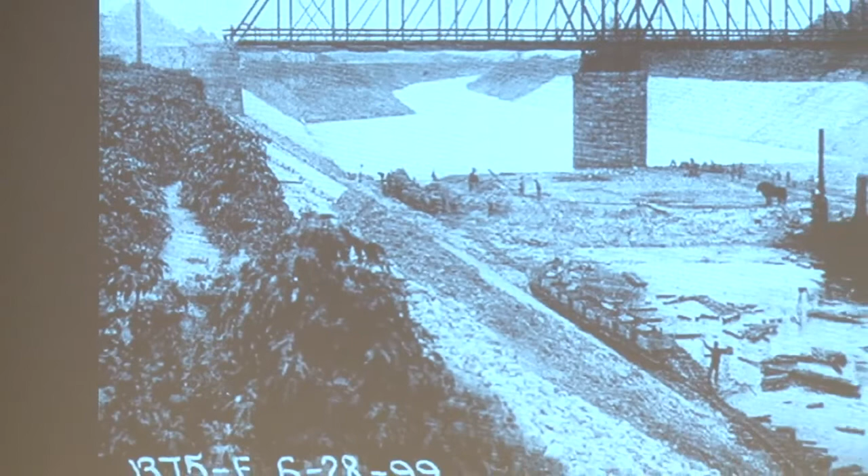But then today, as we see the effects of this over the last 100 years, we now see that this reversal is contributing to a dead zone in the Gulf of Mexico and a lot of other detrimental effects that have come to light over the years.

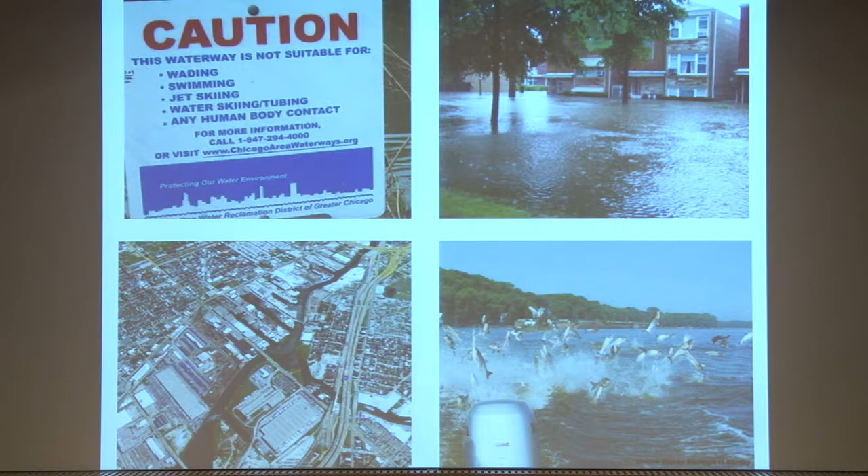In many ways, I think we work similar to industrial designers, trying to find out the facts about how problems impact people before we start jumping in with design. So with this project, we really talked to a lot of the people that use the river today, and in what ways they use it.

We also taught a studio—this was at Harvard in 2012—to start thinking about what the barrier could be. It's a barrier separating the watershed, but also potentially a bridge, and other things. So with all this research, we came to the conclusion that the problem needed to be addressed in steps.

And so it was a design problem to think of how the different steps could go toward renewing this waterway. So technical things, but also the idea of communicating this to the public, so that we could build some support for changing our use of the river.

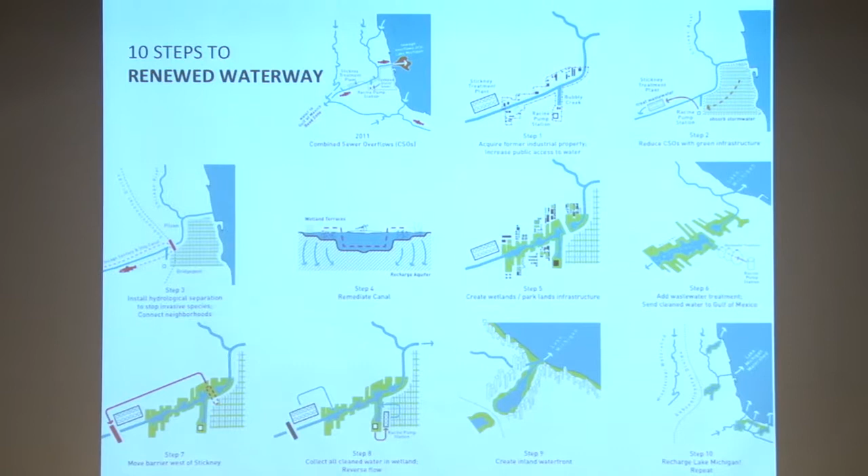The idea really was to cut these, to reestablish the barrier and to recycle our water. Today, the water is something like 2 billion gallons a day. This is a cringe factor when you're in California. 2 billion gallons a day we use just to flush sewage down the river. It's not used for any other purpose.

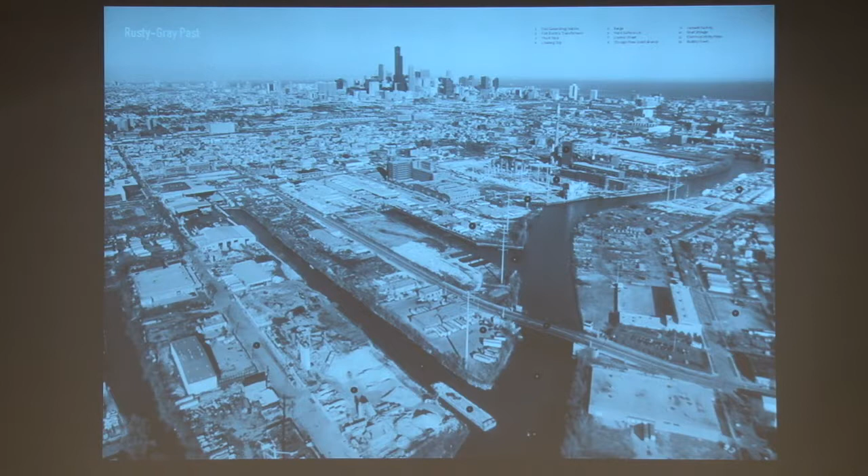And so there really needs to be this massive change about how the water is used. So we tried to help the public envision what this landscape could look like if it's no longer used in this industrial way, which continues to decline. Maybe new industries could come in, and that recycled water, after it's cleaned, could be put back into freshwater lagoons that could be returned to the lake.

When we finished the book, we did a lot of public outreach with citizens to understand these issues, and at the same time there was a new mayor coming into the city, Mayor Rahm Emanuel, who wanted to take the river and make that really a focal point of his mayorship, because he really liked the fact that it ran through neighborhoods as opposed to being this front representational landscape. It's really more of a community landscape.

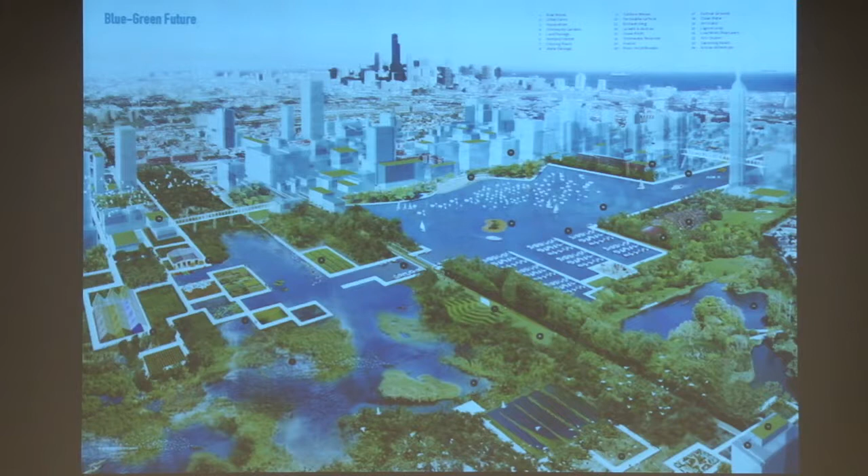And so we were asked to actually think about how we might, as architects, intervene along the river. One of the interesting things is that step number 1 in our book was really about suggesting that the city acquire former industrial property and increase public access, because we felt that people wouldn't care about this waterway unless they had access to it. So in fact, this first project was all about public access to the river.

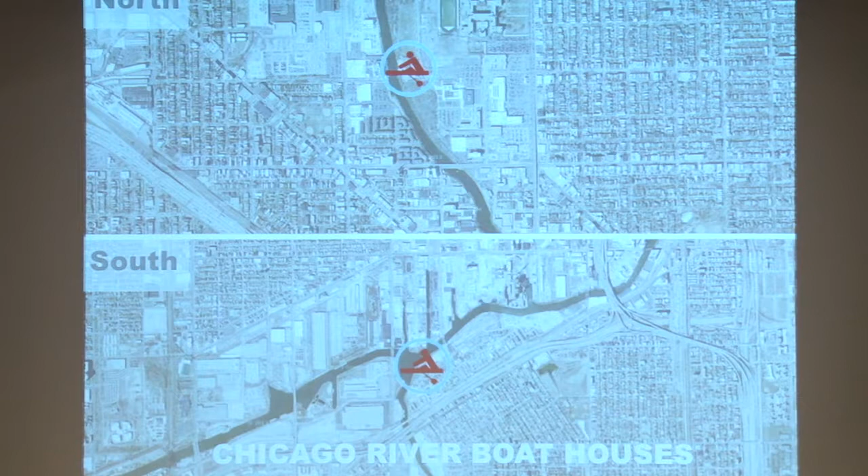There are 4 boat houses that the city planned, and we are in charge of 2 of them, one on the north side and one on the south side, which are for city youth, inner city youth, to use to engage this river, even though it's dirty, to start to use it as a recreational frontier.

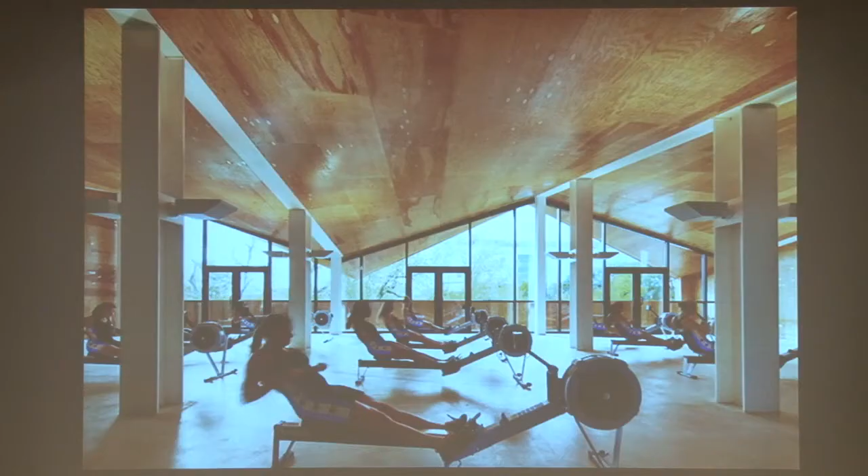It was a very fast project once we got going, about a year and a half from design start to opening day. This project is a boathouse for the Park District, but it supports a couple of clubs that were already using the river, and it allows them to up their game, I guess, and to compete on a larger scale.

There's a field house inside for practice in the winter, and a storage building. So this was a very minimal budget project, but the result is amazing in terms of how this project is serving the community.

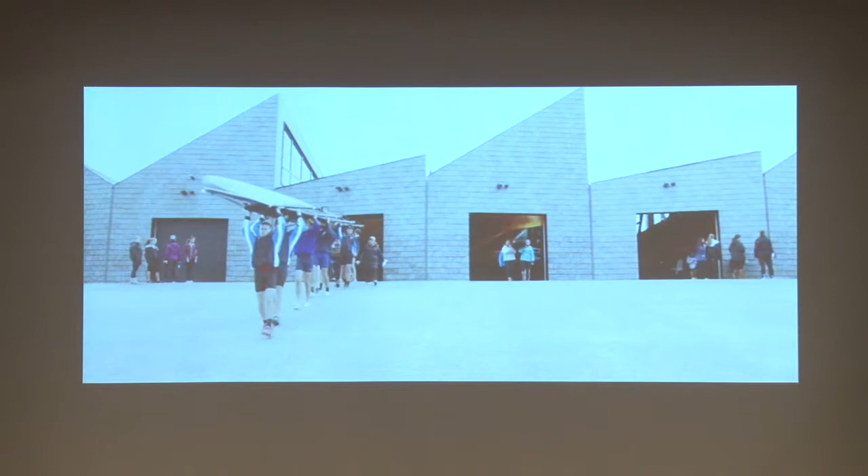They have programs for disabled veterans to learn how to row, and they have children's programs and adult programs. But what I really like the best, I think, is seeing how the boathouse, which is on the lower right there, has really activated this industrial waterway in a completely new way, and made it a focal point for all of these communities to engage it.

And there's a lot of real industrial parts of the river, but there's also a lot of very strong ecological points.

We use this motion of the oar in the water, looking at the translation of that into kind of a roof form. Two different types of trusses with all straight elements in between create a kind of warped roofscape that captures that motion and energy of rowing.

This is during construction, and you can see the structure is very simple, just metal studs and wood, and then plywood stretched over those forms. So they have an indoor rowing tank for the winter, and here you can see kids using it.

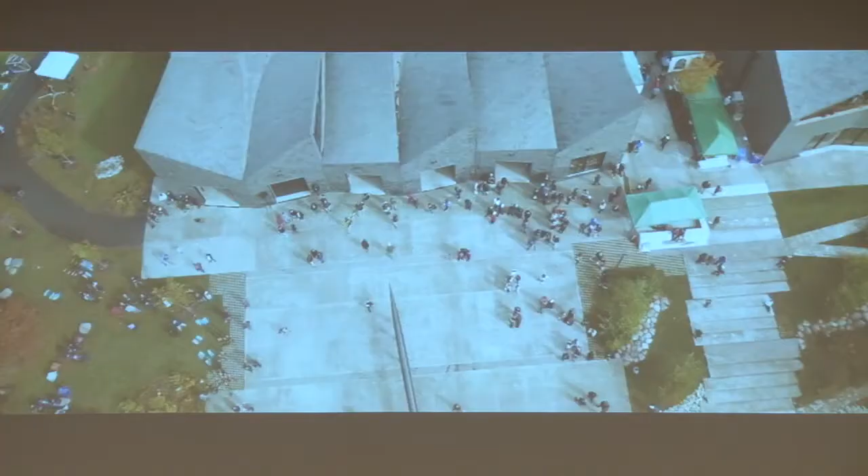But it's so exciting for us to see this river come alive in this way and start to shift the focus from the lakefront over to the riverfront.

A lot of our projects are like this. There's a very strong attention to material and architecture, love of architecture, I think. But there's also a desire to do something good for our community. Trying to describe what that is, I think we are idealists in a certain way, but we also want to see things get done. So we kind of nicknamed it Actionable Idealism, because we want to put our efforts towards things that are going to become architecture.

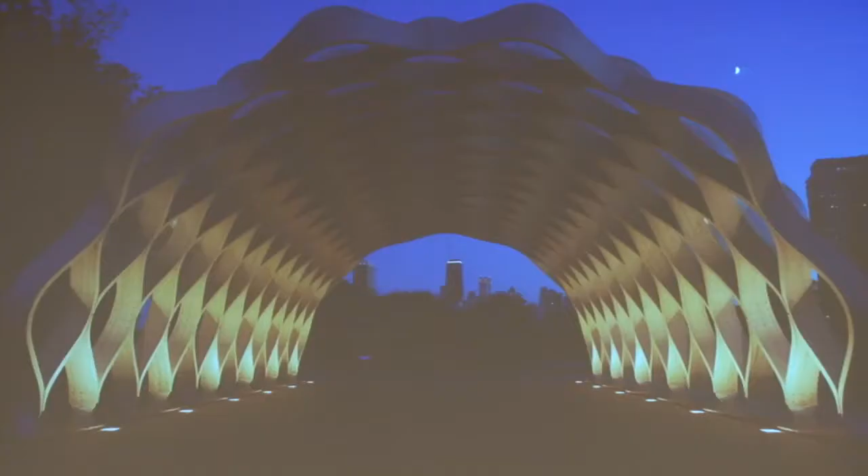I guess in a way this project fits under that category as well. It's a nature boardwalk at the Lincoln Park Zoo, an early zoo in the city of Chicago. They also had a historic building there from 1908.

The pond in the foreground is really only a 3-foot deep reflecting pool. This Park District property was right adjacent to the free zoo in Lincoln Park, and the zoo leased the land from the Park District for 50 years, wanting to improve its quality. It had broken down over time and become kind of like a smelly pond with a broken edge. So we were asked to help reinvent what the pond would be, but I guess they were really asking us to do some interesting architecture to draw people to the space.

In this case, we really helped to redefine what the problem was. Here's a view of how it's starting to look now. We realized that it was the pond health that was the real issue, not just the fancy architecture - it takes engineering to understand how this pond could do more.

We worked with hydrologists in this case to understand what was flowing into the pond, making it much deeper, which allows the water to be better quality and for fish to winter over in there. A huge part of the project was really redefining what the water body was and making it possible to hold stormwater.

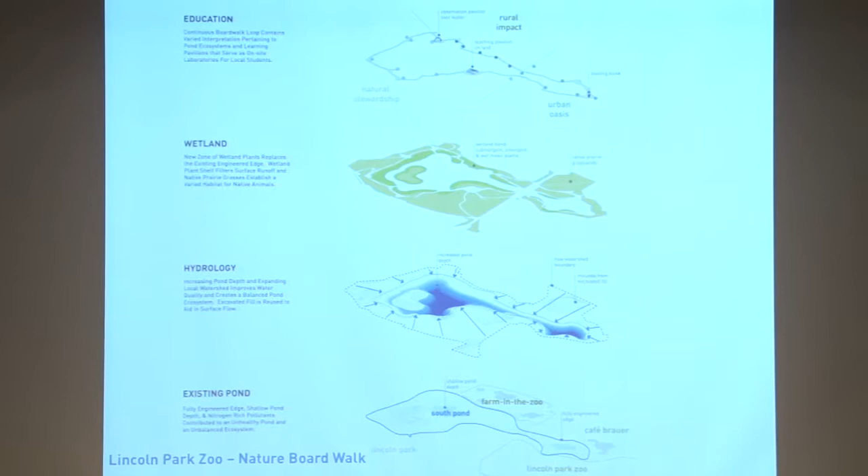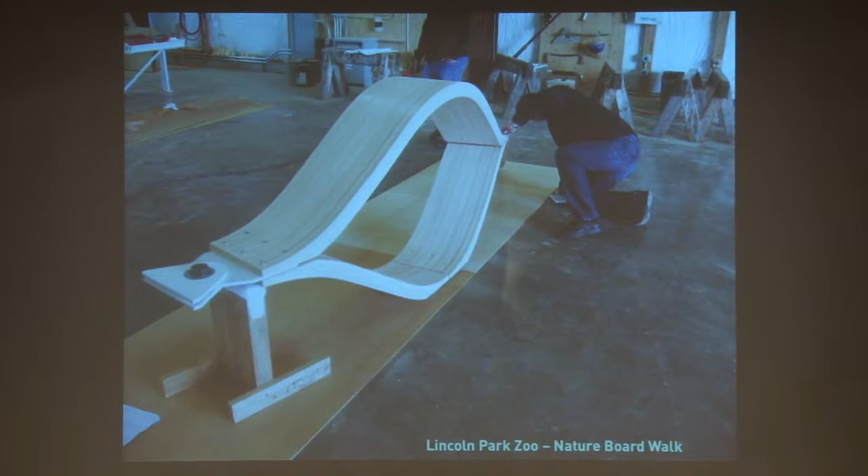Then architecture - it's so important to have something that attracts people to this space. We were really interested in using wood, bent wood elements. These are laminated and bent in 2 directions, prefabricated stems added together to create a wooden structure with a kind of fiberglass cover over it, so it could be used for educational purposes and for gatherings.

So this is some of the images of the building. It went up very fast, about 5 days for the pavilion to be constructed on site, whereas the pond probably took about 6 months to dig out.

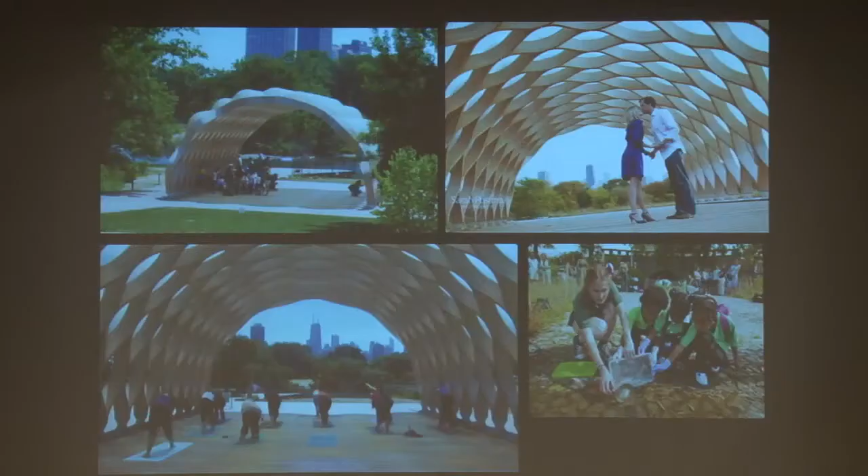It's used for a lot of different things, including yoga classes, which kind of spontaneously started showing up there. But then mostly weddings is the main thing, especially architects who like to get married there.

It's so amazing to have this real biodiversity within the middle of the city - such an important piece of green infrastructure, and it's also working to contain the stormwater. It's an incredible space.

There was a small rookery there with 40 black crowned night herons using it for nesting, and the numbers increased to about 400 pairs since we finished the project.

We also have coyotes, which I know you don't really like here in California, but we like them in Chicago - they help get rid of the rats. They've adapted to be a pretty helpful urban animal in the city.

We're just interested in how closely this biodiverse nature and urban space can be intertwined. This is a dance group using the pavilion as well.

So in doing these projects, I think as an architect, we got the opportunity to do a tall building in 2004. A client came to us and asked us to design a skyscraper. At first it was kind of odd - we had never done one before, and I didn't really know what to think about it, given our work is very community-based.

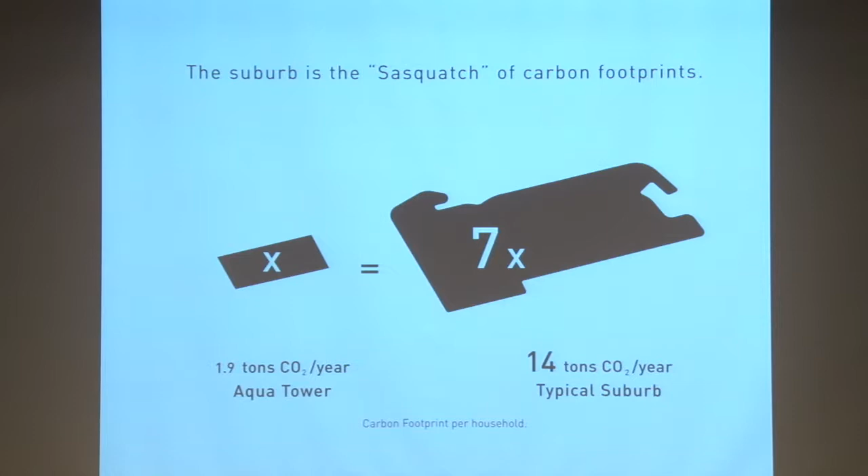So in the same footprint of this Aqua Tower, which I'm going to show, the land use is equivalent to about 333 acres. You have 0.32 acres for the tower, equivalent to about 333 acres, with the same number of households on each. If you look at the use patterns, you find that the suburban pattern really forces you to spend about 7 times more carbon, because of the way that you have to move every day for everything through the use of the car.

A group called the Center for Neighborhood Technology has studied this and found that in a typical suburb, you're using that much more carbon per household than you would be in an equally dense building in the city. So that led us to design a tall residential building in the city of Chicago.

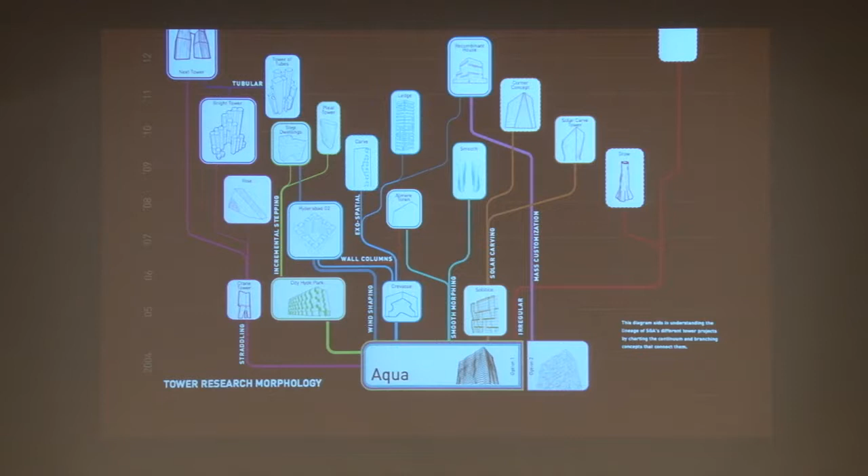This diagram shows the growth of our different ideas for those buildings. After we finished the Aqua Tower, everything went on hold in 2008. We were still asked to design buildings, but none of those after 2008 immediately got built. We found that tall buildings tended to have certain ideas that held them together, so we mapped and tracked our own ideas and associated them. Most of these strategies are ways to reduce energy or increase the social aspects of living in tall buildings.

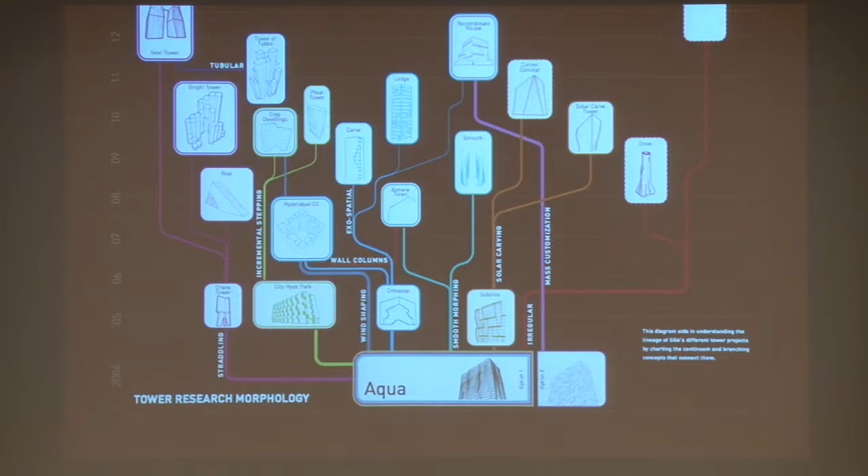These were some of the models that we developed, and they were shown in a show that featured our work at the Art Institute of Chicago in 2013.

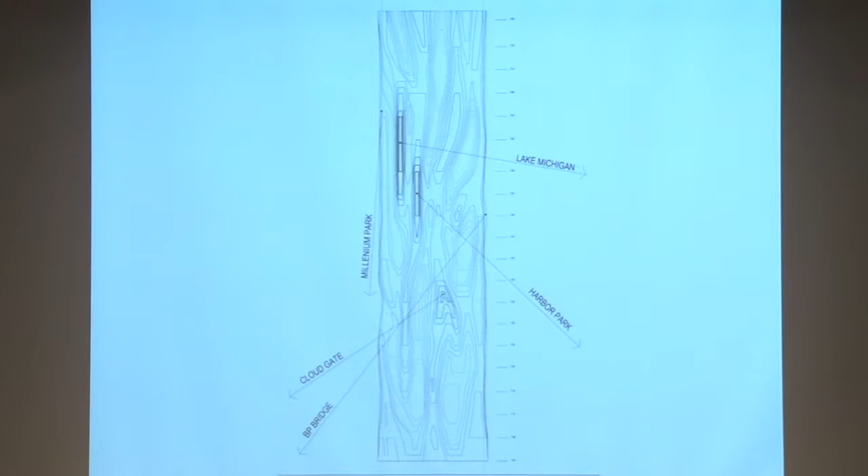This Aqua Tower is an 82-story tower, and we started that project by thinking about the building more like a topography or a landscape that would have variation relating to specific things in the city, specific views between and around buildings. The site was surrounded by a lot of different buildings, and it wasn't like perfect views all around.

So we developed this in response to that, and the topography really represents the extension of terraces for people's outdoor use off of the building facade. These terraces were made by the floor slabs extending out, giving people different views and really generous outdoor spaces.

The idea was that you could use the outside facade of the tall building in a social way within your own family, but also as a way to see other people who live in that building. A way to make eye contact, say hello, almost like over your back fence in a suburban yard, but bringing that quality into the tall building.

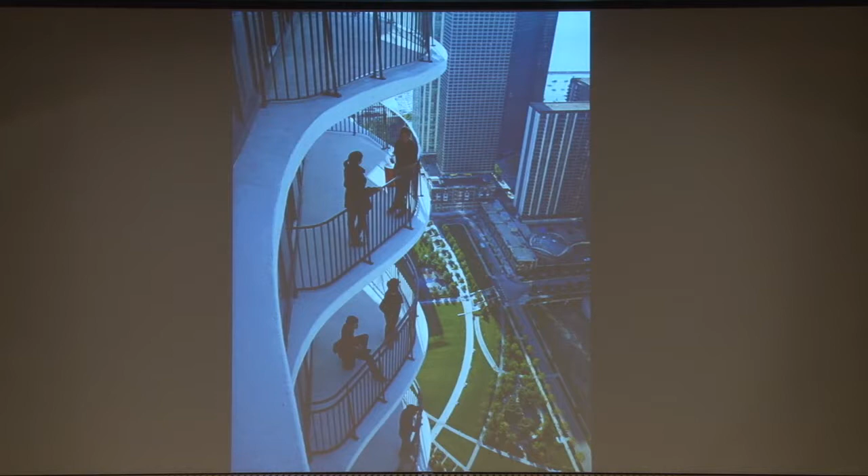It opened in 2009, and it's an incredibly social building. A lot of different people—empty nesters, graduate students from the University of Chicago—live there. It's really been a very successful tall building, both from the owner's perspective of selling and renting units, and from the people that live there.

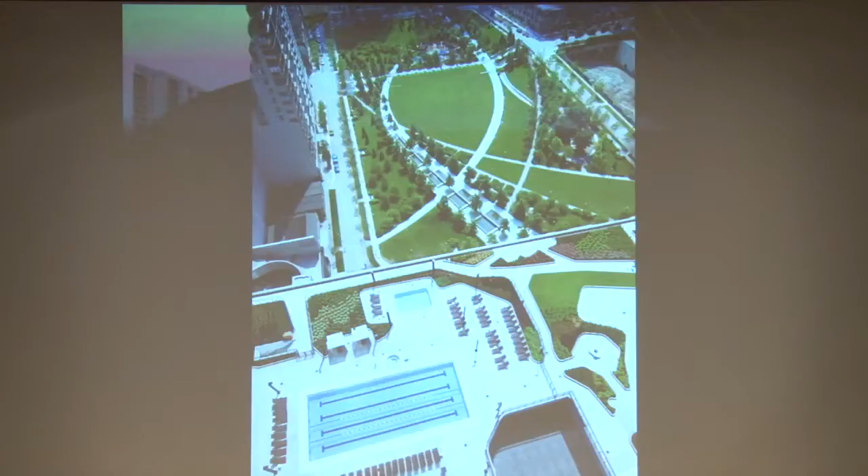It was a building that also had a lot of work done around the ground plane to connect it to the outdoor spaces, including a big stair we designed, and a podium that's active on all four sides with retail space, so there are no dead walls around it. It also has a roof deck that's a pool and social space, so besides the balconies, there are other ways for people to interact.

After we finished that building, one of the goals for our next residential building was this: I think these are really the DNA of the city. If you're an architect and you're not working with any kind of residential building, in a way you're missing what is so crucial to the city. It's really important how people live.

We wanted to continue doing these, but improve our performance on the slabs. The Aqua Tower has slabs that go from inside to outside, and in our climate there's heat loss through that. We originally wanted those thermally broken but weren't able to accomplish that, so in our next design we really wanted to address better thermal performance, but also, again, more social activity.

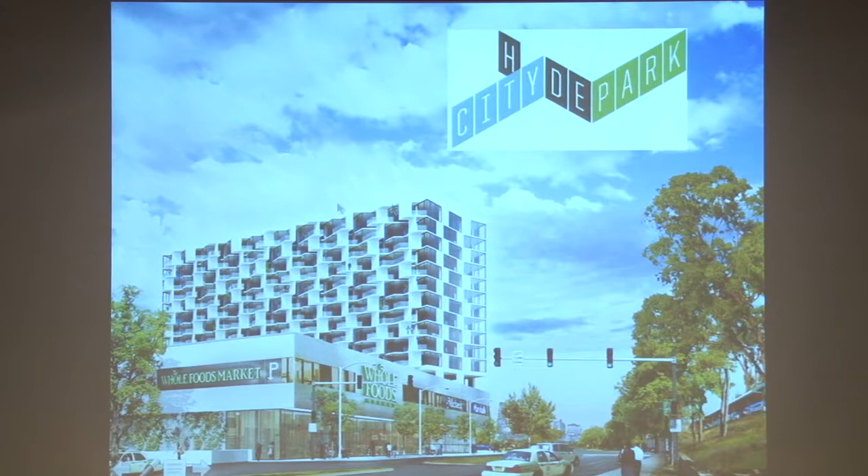This is a building currently under construction called City Hyde Park. It's a medium affordability rental building in Hyde Park, where the University of Chicago is located. We again worked with structure, because structure is such a good element to use for design, and in tall buildings you don't have very many things to work with.

Here we designed a column that alternates back and forth. It looks like a zipper, and that zipper allows us to make big bays that have no columns in the corner.

So in the way this building is facing north and south, we thought of it almost like one side is for more introverted people, and one side's for more extroverted people. On the introverted side, you have the skyline to look at, and on the extroverted side, we made these balconies that just explode off the building.

For the south side, they also provide sun shading. They're almost like a stack. What I really like about this, they're stacked columns, these panelized columns, and each one is a column, so it takes its own gravity loads down to the ground and then ties back lightly to the building. So we're able to do a nice thorough thermal break on this building.

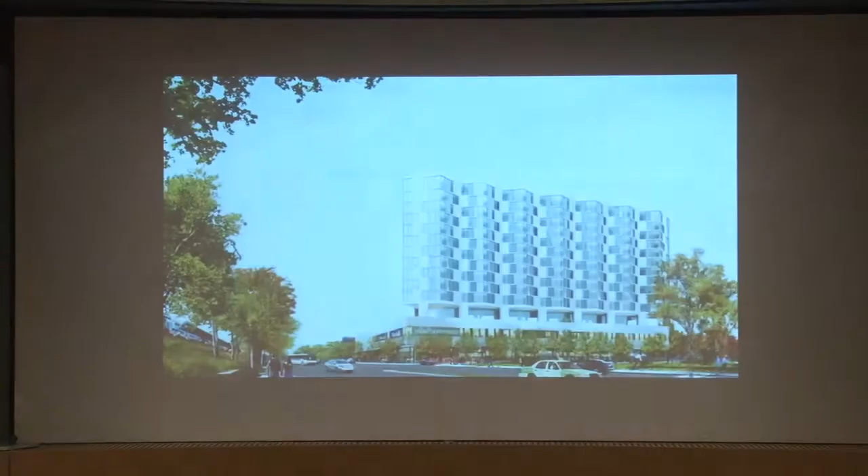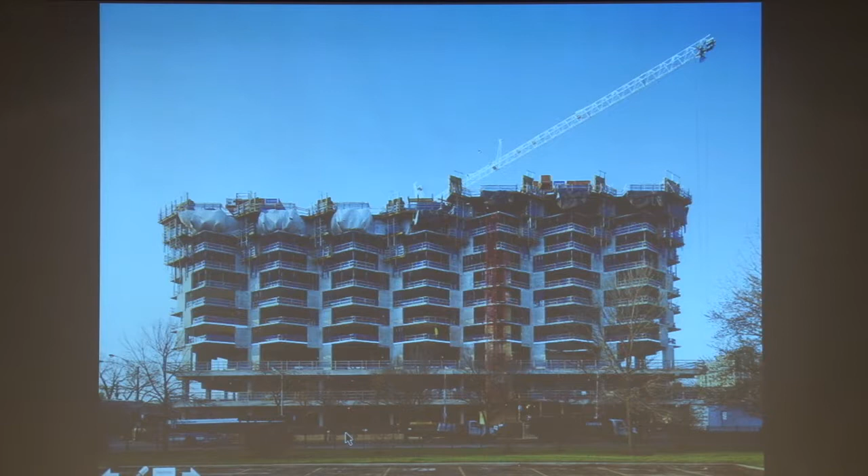And now they're just starting to pull the scaffolding away from this stack of cards that are the balcony stems, which I think will be really dynamic in terms of their spatial qualities as well. Really exciting in this part of the city.

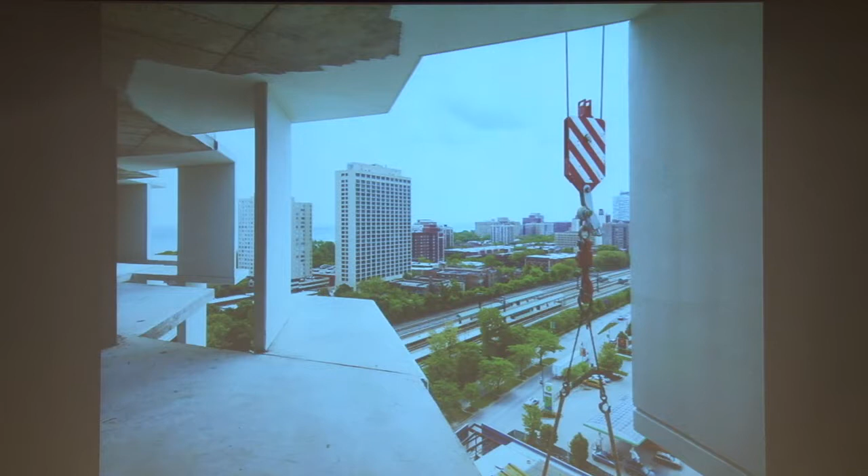Very simple and not an expensive project at all, just really addressing those kind of needs of living in the city. And I couldn't leave tonight without showing you the project we're doing in San Francisco.

We're really excited to be working in this city. It's an amazing city. You can see our site right down there, the little blue dot. An amazing city for its nature and views, and it's just pretty gorgeous, let's say.

This is our site on Folsom Street. And unlike some of the other projects I showed, I think the students worked in this very close area to this site on their senior projects. One of the things is it's a really nice area which is well connected to transportation and walkability. I think it's even going to get better that way.

But the other interesting thing about it is the whole site was pre-planned by the city of San Francisco. After that bridge fell down in the last earthquake, they decided the Trans-Bay Authority would lay out what would be the future. So as an architect, we came in and it was already kind of set up what we would be doing, including market rate units and below market rate units, a low part, a podium, a courtyard, and a tower.

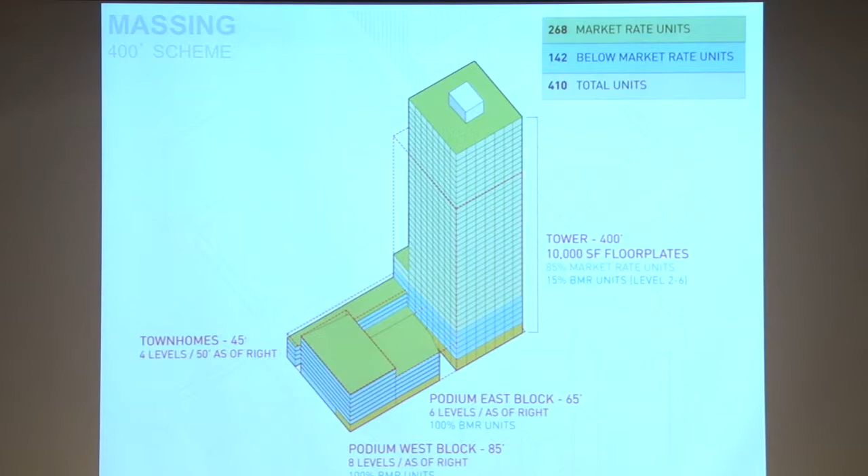So it's kind of like, okay, now what can you do with that? But what we started to think about was just what makes San Francisco, and what makes it unique, and how can we add to that dialogue.

We looked at a lot of these buildings with bay windows, beautiful old small buildings, and also tall commercial buildings that took advantage of the bay window. And I guess the bay window is great because you get more views and more light compared to a flat window. So we took this bay window idea and started to explore what benefits it could bring to the high-rise building for living.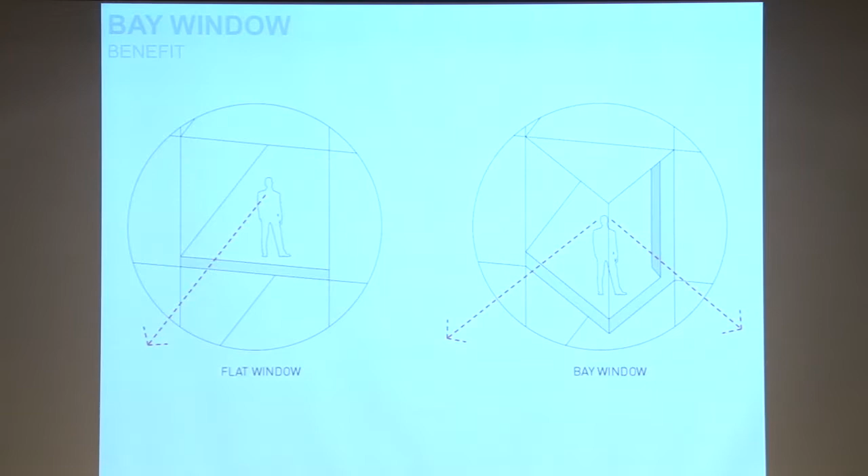It could be a balcony that struts out. It could be windows that bring in light and air. And there were just so many great views. I guess we didn't know which one to respond to, so we started to think about responding to different views throughout the height of the building.

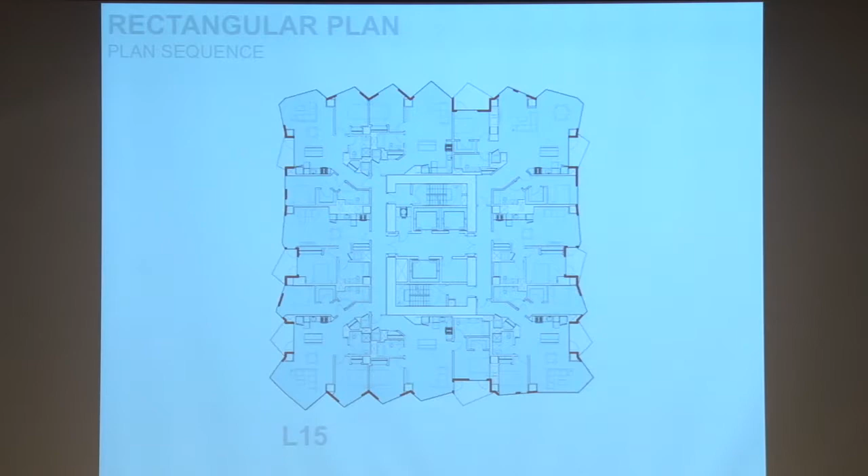So this is just a series of plans, and if you notice the exterior of this envelope, you'll see it start changing - this is starting at the top, moving down to the bottom, so it's 24 floors. You can see how each level kind of morphs just a little bit, but the columns are staying in the same place. And that produced this rotating bay, we called it a migrating bay, that wraps around the corner.

So the units won't be identical, they'll have slightly different views. And also it gives it kind of a dynamic use of the bay window in a tall building. So we're really excited about that, and it's slated for starting construction later in the year. Really looking forward to that.

And one more tall building, well, just one that's currently on the boards in Chicago.

If you notice our work with tall buildings, a lot of times we're thinking of it more on the human scale, like starting with a smaller piece and adding that up, like with Aqua, the slabs, or the bay window, instead of starting with an outline, like something gestural. We're really starting with a building block, I guess, is the way I look at it.

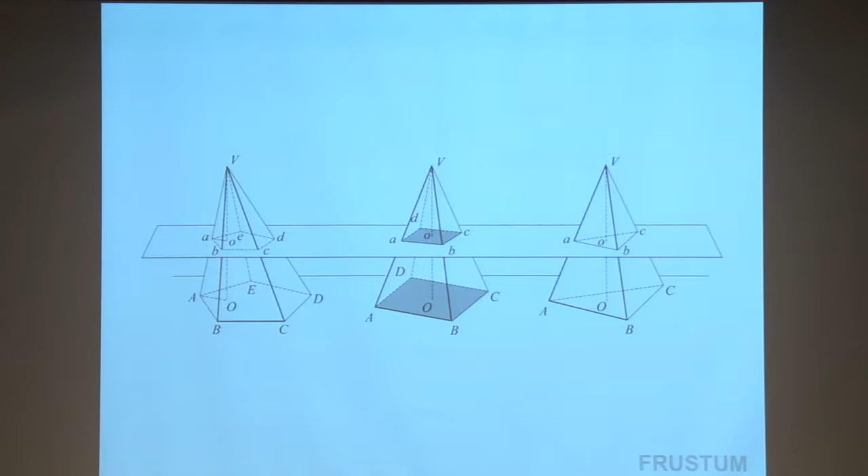Here, the building block is what's described as a frustum shape, a truncated pyramid shape. The reason we started with that was thinking about maybe we could alternate views between sky views and city views by flipping this thing upside down, and also have different relationships to energy.

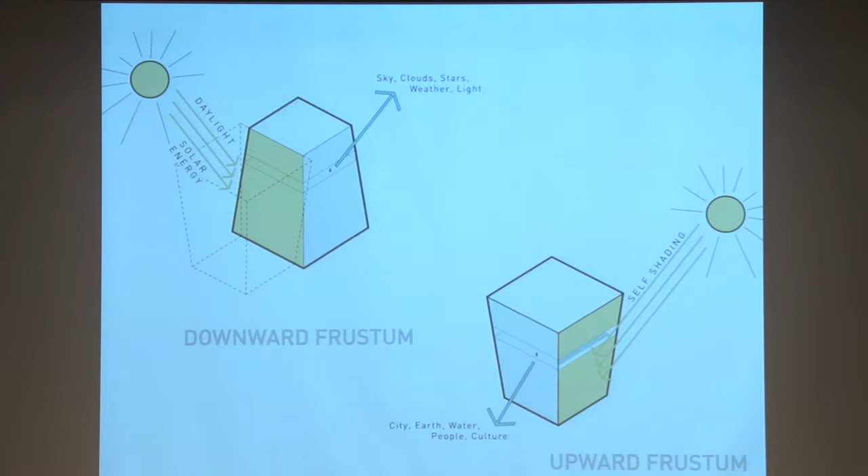By sloping it down, looking down at the city, you can get a little bit of automatic sun shading. We started playing with those variables, and also looking at what they would do if you put them next to each other. You start to see these corners develop. So with a typical building like a slab tower, you get 4 corners, but we were working with a smaller scale building block, we actually get 8 corners on every floor.

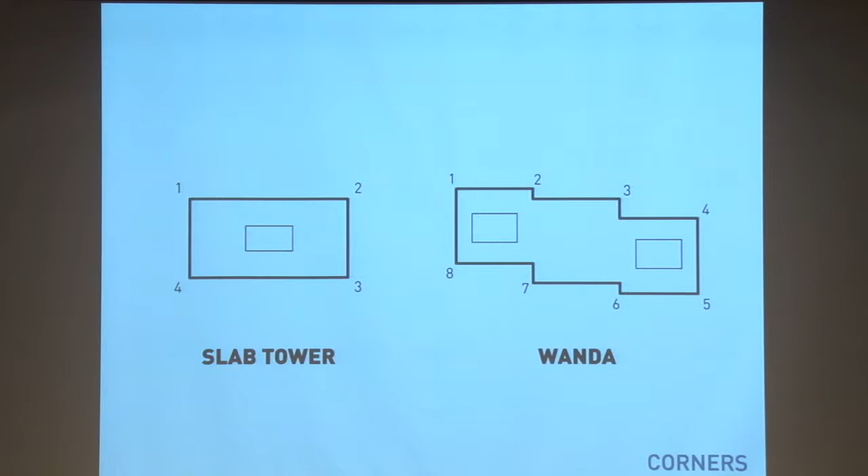So that really helps the units too, because you get more views. Then we started to turn them, stack them up. This is one of the volumes. In doing this, we're starting to reduce the wind pressure by giving more surfaces and not having straight surfaces. These are all things we've learned over the years about doing tall buildings.

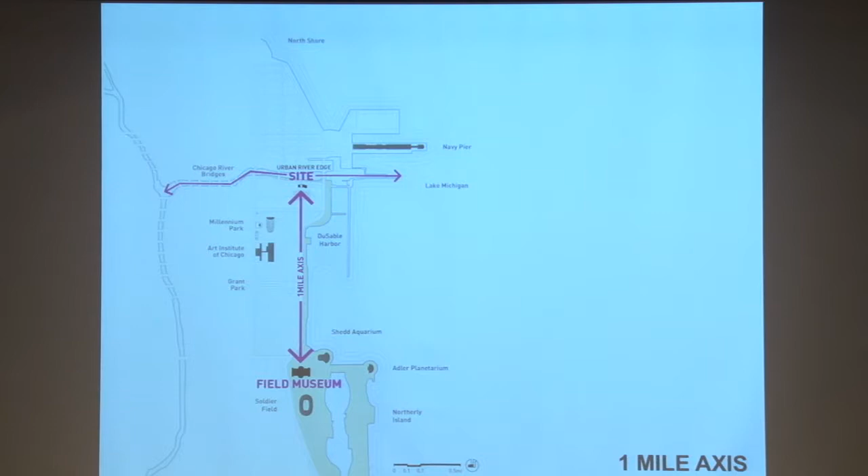But the exciting thing for us on this project was really that we have a site that actually has a long distant view for once. Most of our projects are always nested in the city. This one, we called it the 1 mile axis, like from the Field Museum, looking straight north, you see this building.

It's because it's located on a site where there used to be a road. So from the south side, it really aligns with a long vista. On the north side, it takes part in this river wall. Those are 2 things we considered. This would be the view from the south, so it's super aligned right with Lakeshore Drive going north.

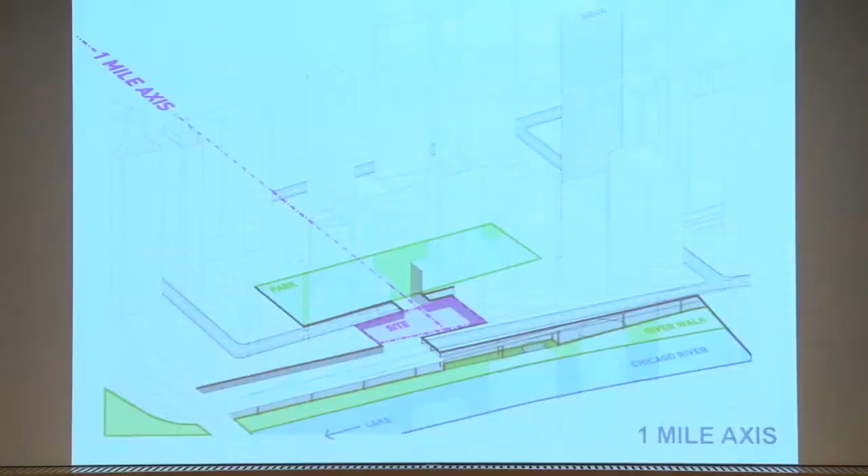When you zoom into the site itself, you see the 1 mile axis to the south, but you also see this problem of a bunch of infrastructure blocking between our site and the river. There's elevated roads. So one thing we really wanted to do was make the 2 parks reach each other and let this tower straddle over the connections, both on the upper level and the lower level. So the straddling action for the structure.

Here's a section through, these are the elevated roads, and then here's us lifting up and having the structure bridge over these 2 areas. It's challenging here, but we're working with the park district to get those 2 parks closer together. Then the form of the tower really came from trying to expand the number of green spaces on the roof.

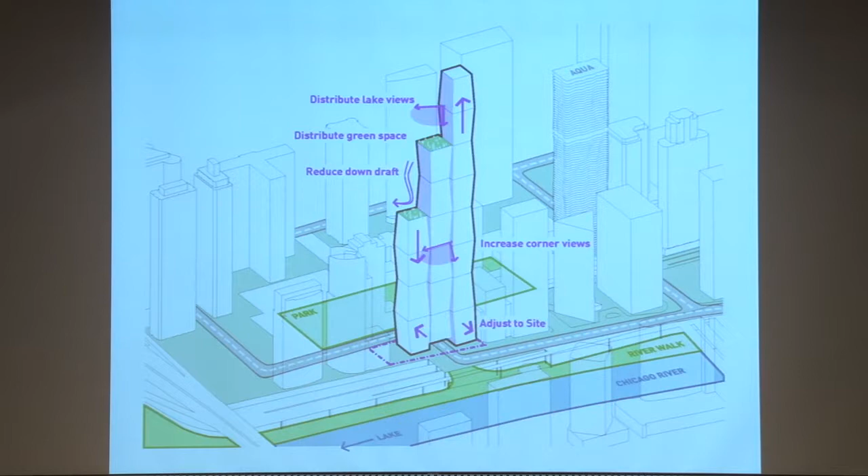Differentiating based on the program, there's a hotel at the bottom and condominiums up at the top. This is the top section of the building, starting to look at how it goes together, and really tweaking those proportions and getting it to work for both the pedestrian level and the overall form.

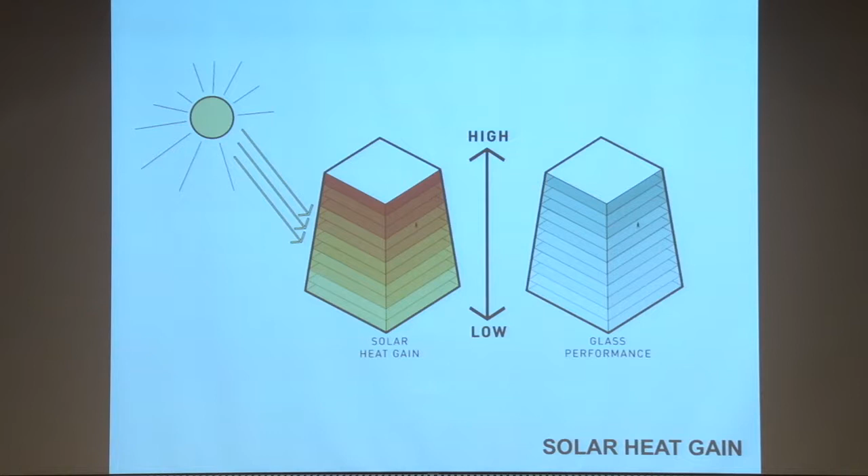So one thing we found out was that frustum form, when we have a smaller floor plate, we have higher heat gain in the space versus the larger footprint. So we used a gradient in the glass performance to ameliorate that, and you can see how this starts to really also emphasize the form, which is really interesting, kind of starting to look like this woven form and lapped glass.

As John pointed out earlier, this is slated to be the 3rd tallest building in Chicago, which honestly we never really think about how tall it is. It just, because you almost can't control it until the end when you know exactly how many units are going to be there. But in this case, the Wanda Group, who's financing the building, really wants it to be the 3rd tallest, so that's one of the rules.

I think the issue of tall buildings and density, and making the city more dense is important, especially when you have a city that's sprawling out. But I think it's time to also think about how to do that in communities. How do you introduce height and more density even when you have a low-lying community, and how can you do that sensitively?

This is a project that we recently completed—well, I guess it's ongoing. It's an idea for introducing a live-work neighborhood into an inner ring suburb.

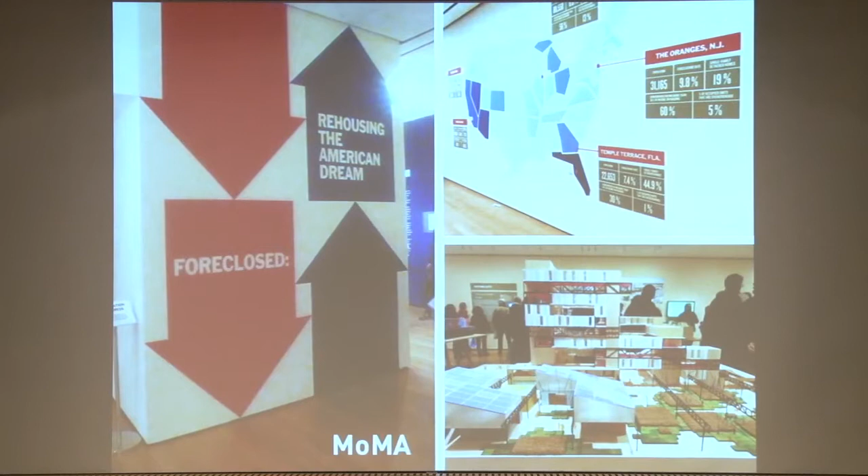We decided we wanted to work on these inner ring suburbs, which are now becoming vacated because people are either moving further out or moving in. So we picked a suburb called Cicero, Illinois, right on the edge of Chicago—literally right outside the city—and it had suffered a really high rate of foreclosure.

It's an older suburb with a lot of bungalows, but they had something like 1,055 foreclosures in the first year of the crisis and another 1,000 the next year. So we wanted to look at that as a case study.

This really has more to do with community, and now connecting those dots between what is an urban system, what is a sustainable urban system for a place like this.

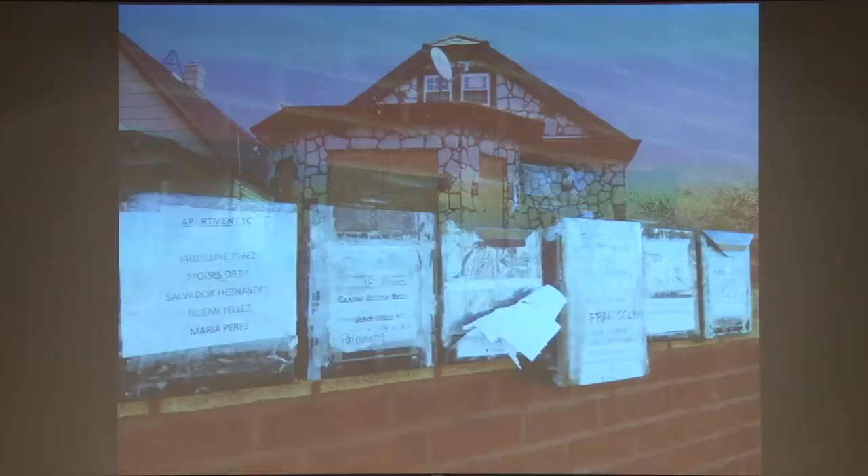The original housing was for the nuclear family, but the way the bungalows were being used was really by dividing them up and having multiple families live there for affordability.

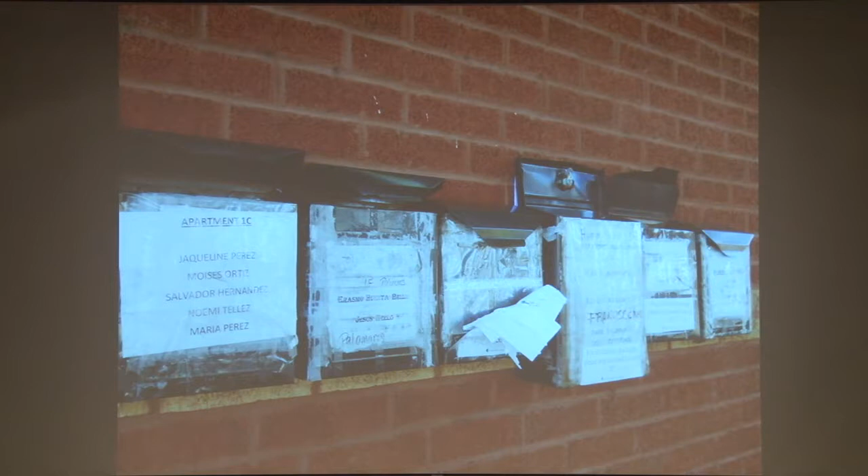We also found a way to interview people—it's a very sensitive topic about foreclosure—but we talked to people who had experienced that and found out the main reason for their foreclosure was really because of the loss of jobs. A lot of the people who live there worked 2 and 3 jobs, but when they lost those jobs, they were foreclosed upon.

Cicero is a place of immigration, originally from places like Lithuania and Poland, and then most recently from these 3 states in Mexico coming directly into Cicero. That was a different situation than the typical city in America, where the city center is a place of new arrivals. Here we have new arrivals coming directly to the suburbs, and there's just not enough services to help people get started.

At one point, this place had factories that employed—this particular one—40,000 people in one factory, but those jobs are totally gone.

And the housing that was built for the nuclear family, as I said, is kind of being redefined as multifamily housing. So you can see some of the...

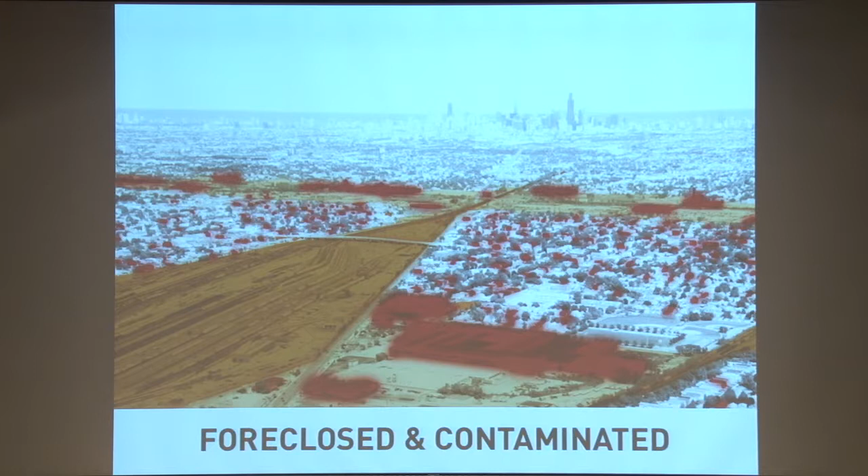In light of that, we thought, let's try to think about the housing first and what to do with the factory. If the bungalows were designed for a 20th century family, and now we have a different family structure, maybe we could take apart the bungalow program and start to think about how it can be reshuffled to address a different structure of family.

So we thought there could be shared things, because the families that come now sometimes have several relatives coming for 2 or 3 months, or maybe even a year before moving on. Sometimes you have unrelated adults living together. So there could be opportunities for sharing certain parts of the home, community spaces, etc.

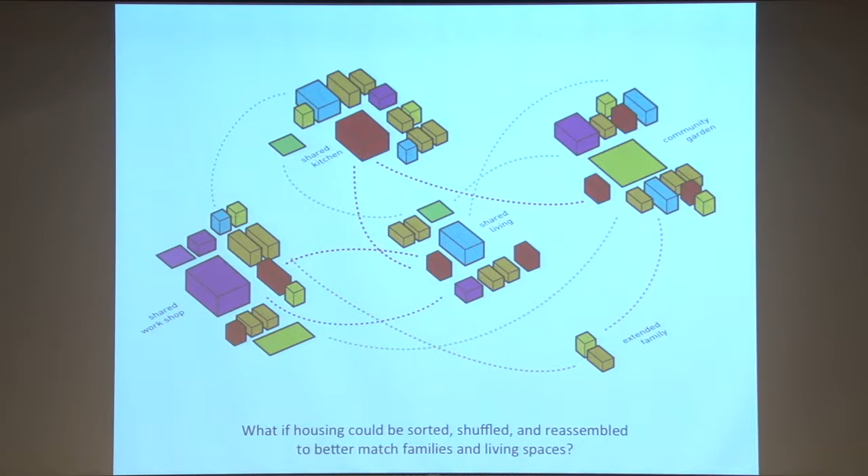Our concept was to make a building that would be flexible, so it could respond to these changing family structures. Maybe you could add on bedrooms and still have it connected into the same apartment.

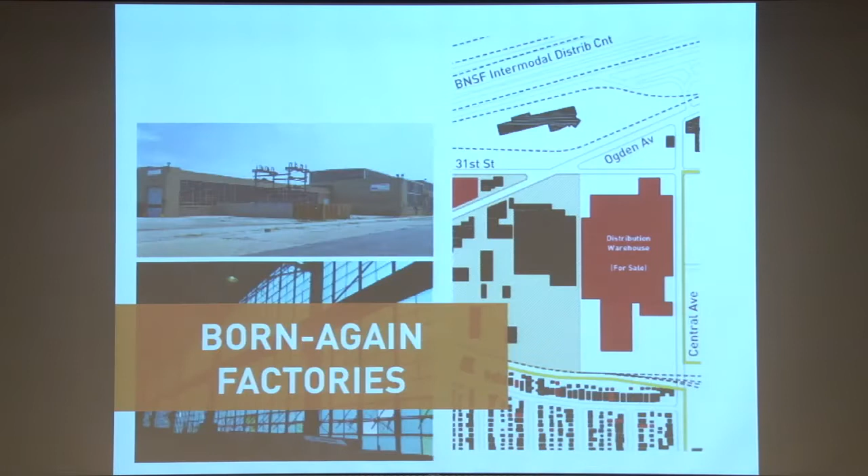And so we took the factory itself and tried to address its issues. We found out that with phytoremediation—not for all the factories, but some of them—you could rip off the roofs and start this process of cleaning them, using plants to clean the industrial era soils. In about 4 or 5 years, they would be ready for reconstruction. We also looked at mining the materials of the building, how much material there is that could be reused.

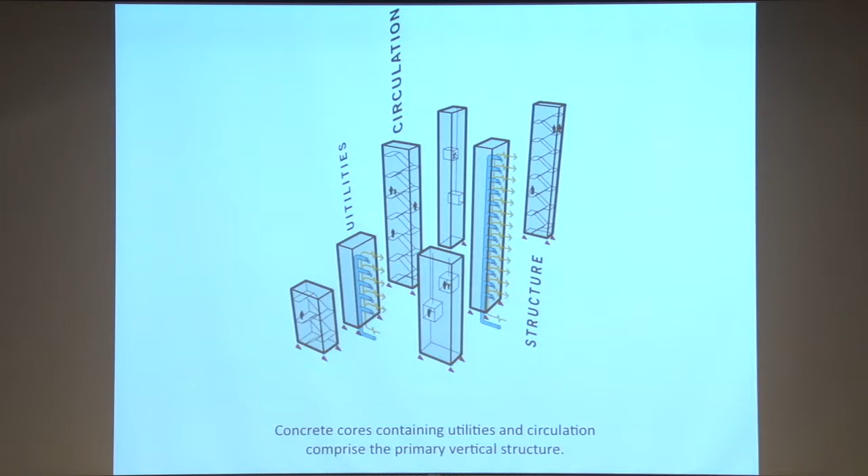So this is where we started to say, how do you introduce some density to this space and also provide space for live and work? Because a lot of people would be working out of their home, but in the suburb here in Cicero, it's actually illegal to do so.

So we wanted to introduce a new model. Maybe the green space or common space could tie up through the vertical cores, and then units that would be designed to be flexible so they could be added together or separated based on families. It's kind of like a mushroom growing out of the factory.

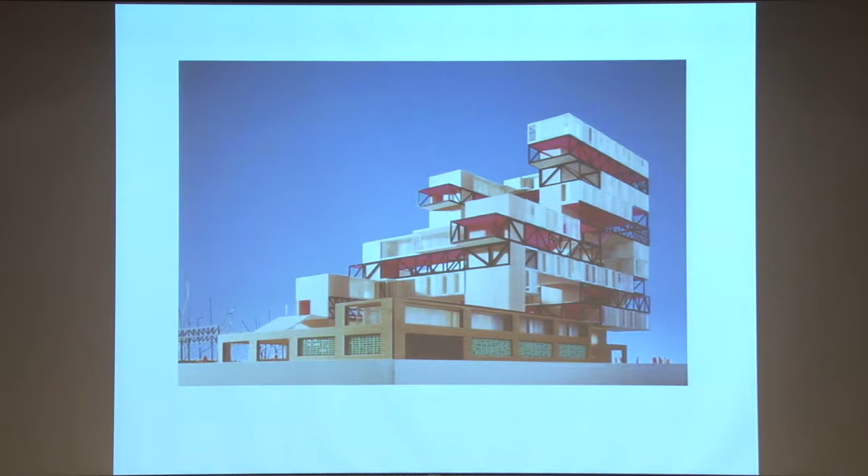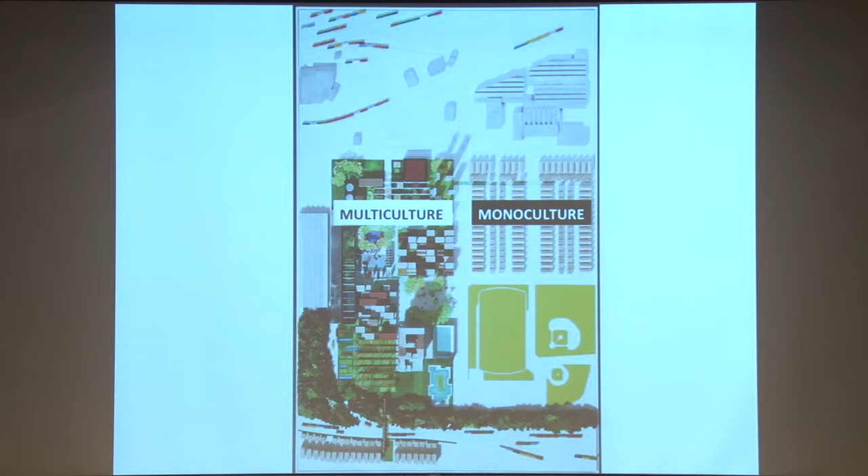So introducing the idea of multiculture as opposed to the past 20th century monoculture, where you had industry, recreation, and housing separately. Now we have all those things interwoven together, in a really exciting way to use resources. Once you get a critical mass of people and create the community, you can start to use the resources to benefit, like using waste to produce energy.

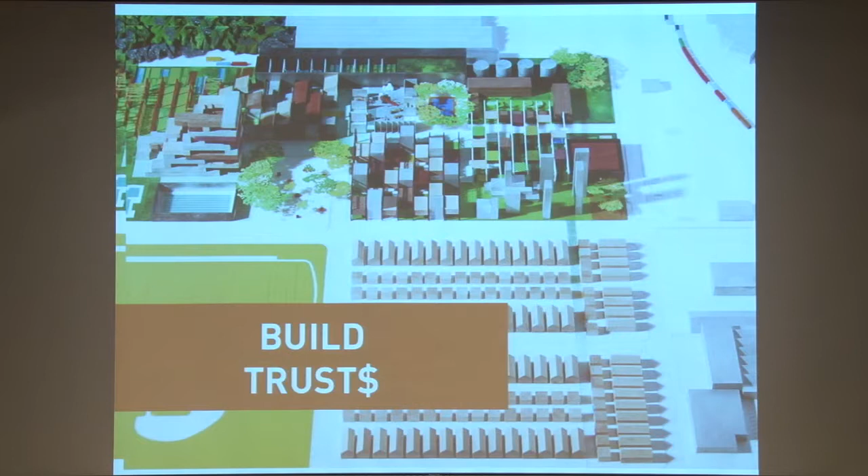We needed an economic model. We were working with an economist on this, and we needed to figure out how it would work financially and also legally. So with the zoning, we had to redact the zoning code to make it possible, and we also had to come up with an idea about finances. So this just shows a little bit what our thinking was in terms of zoning.

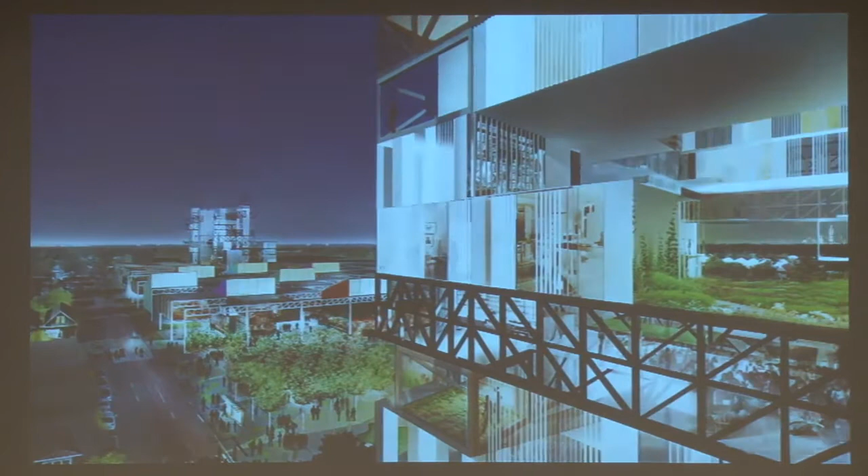We currently have this separation between living and working, even though it's very close together, but we wanted to integrate it. And then the idea that there would be open spaces for markets and living and working spaces.

The ownership model is based on an LEC, a limited equity cooperative. So you would create a kind of a trust that would own the infrastructure of the site, and then people could own their individual homes.

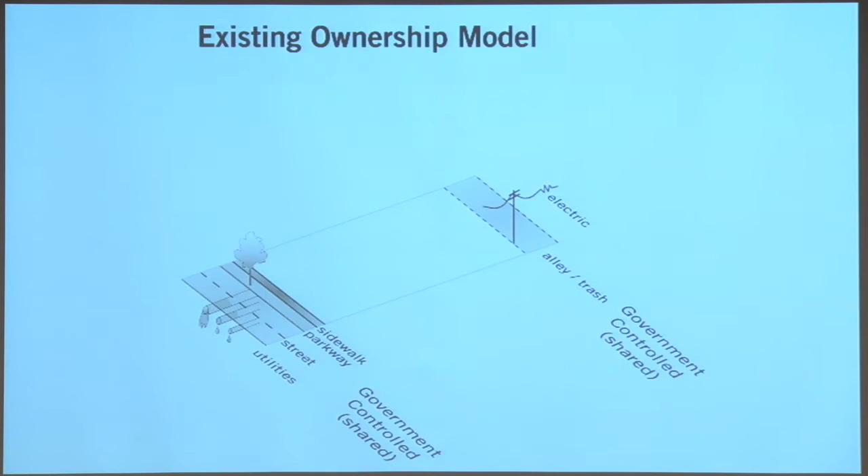The red could be places that people would be able to own, and because they're smaller, they would be affordable. Typically we have private ownership of the land, and the streets and the electric are government. But this would be different in that this co-op would own the infrastructure, and then the individual units would be smaller. So you'd always have a ready buyer too if you had to move for your job or something like that.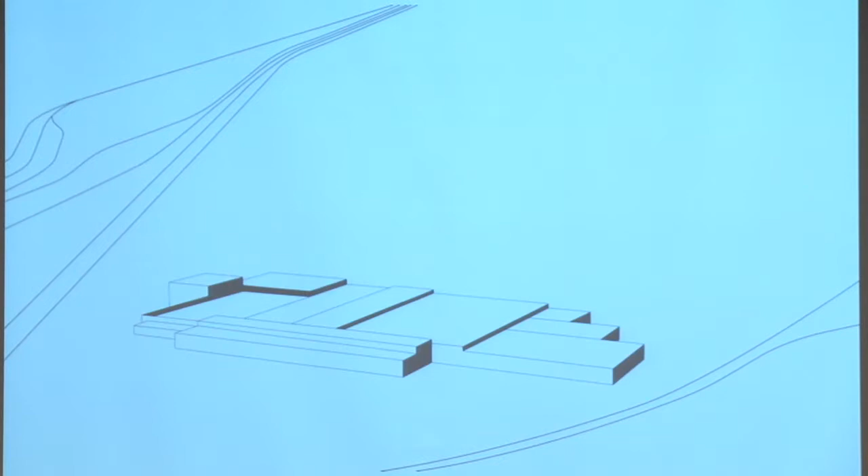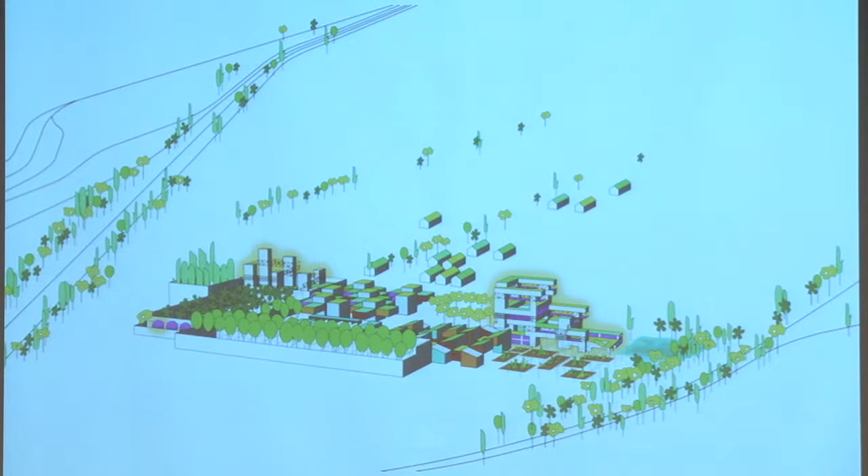This whole concept really took place about starting to heal the factory, basically starting to settle. It's a process. It's not a solution that happens overnight. But little by little you could start to breathe new life into this inner ring suburb and eventually connect it to all the rest of the city.

We're really excited about actually testing this project. We've talked with several city planners who are interested in testing the LEC model. And we think that it could be a way to address some of the issues of affordability that we see right now and inequity in communities.

And then ultimately we're showing it connected to the alleyways in Cicero, which could become much more lively if they were allowed to be used for living and working and selling.

Okay, so finally I just want to show you a project that really speaks to those ideas of community. It's a college building in Kalamazoo, for Kalamazoo College, called the Arcus Center for Social Justice Leadership. This is a project that we finished last October.

I really like the scale of this project too, because I feel like it's something that can work on the scale of the college campus, but also the scale of Kalamazoo, but have a more global impact in terms of what they're doing inside.

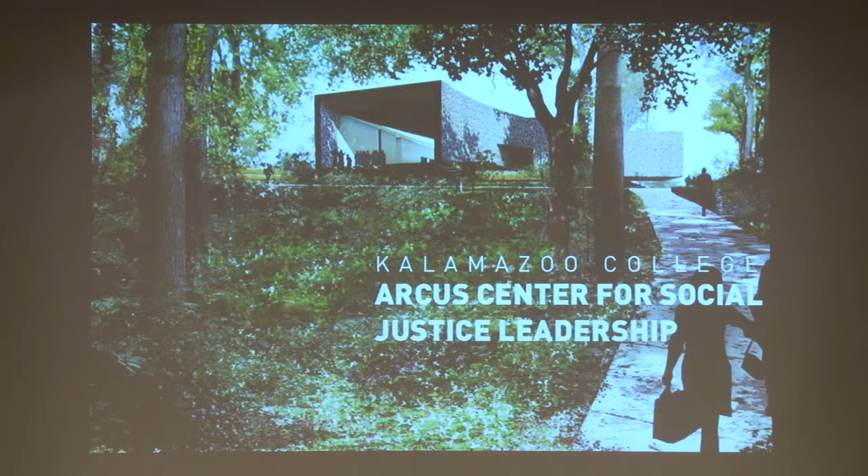This is the campus, Kalamazoo College. It's surrounded by a lot of neighborhood here, and it's a very small liberal arts college that has a very strong program in social justice. So students in their senior year actually go out, they design a program, whether it's about human rights or LGBT issues. They do their program one semester away and then come back to the college.

The campus is a little bit, some parts are very beautiful, some parts are kind of fake colonial, but it's got a cohesiveness. The only thing about the college campus was that this idea of the neo-colonial architecture didn't really fit very well with the idea of social justice. So we were trying to make it connect in some ways and depart in others.

One of the interesting things, I think maybe most interesting on this project, was there wasn't really a precedent for a building designed for social justice from scratch.

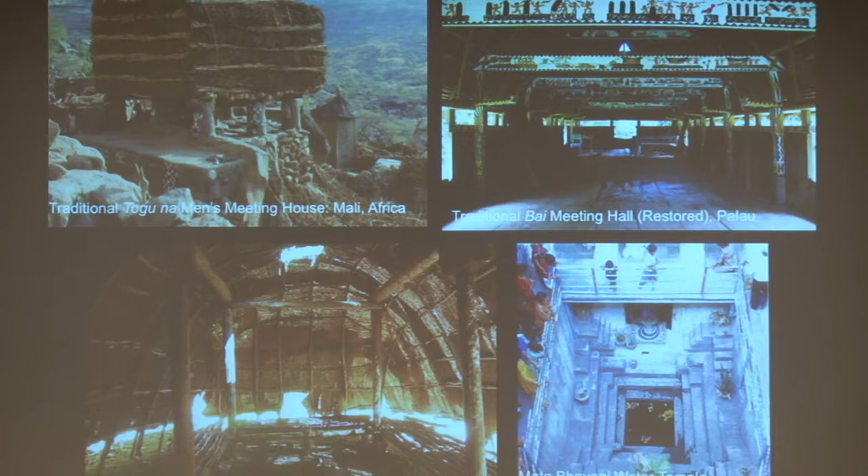If you look worldwide, there are buildings that you could say are for justice. These are community spaces that usually surround water or a fire hearth, places where people can meet. So we looked at a lot of that too.

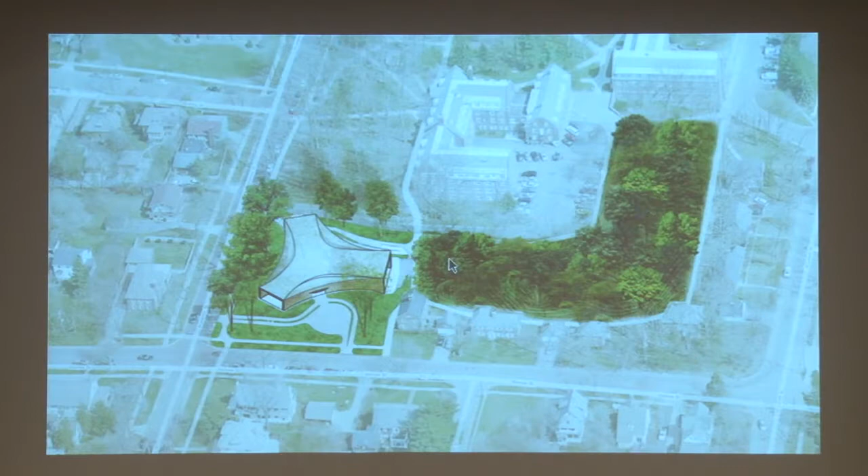On our site, we saw that it was connected to this green grove, and we thought that would be a good contextual element to connect the building to. It also had a relationship to the neighborhood, the green grove, and also the campus. So we wanted this transparency to show what's going on in the building along these three axes.

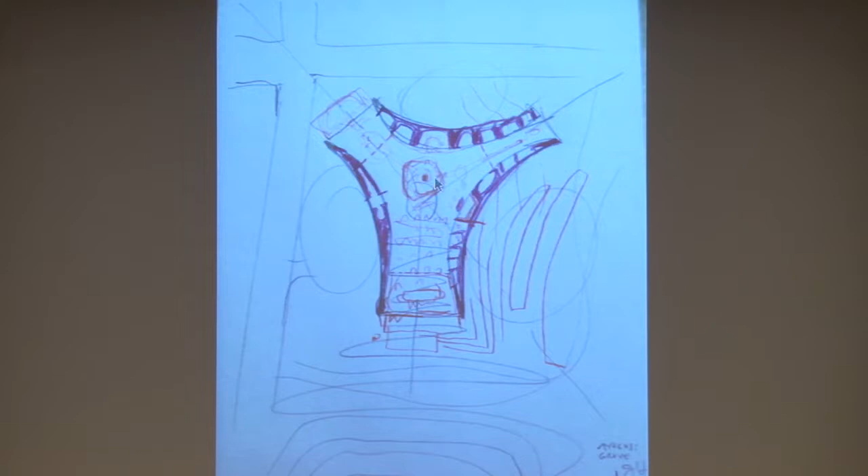Connecting those axes are these gently arcing walls that also create outdoor space. This is an earlier sketch where you can see it starting to take shape, the trefoil-like plan, where the ends of this Y intersection point out to these different views.

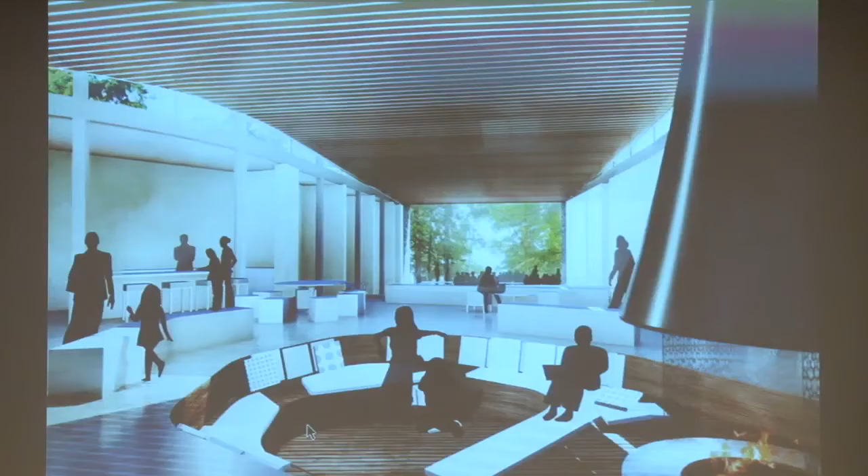Inside the building, it's possible to open up and have the whole thing work more like a street. We stepped the interior so that there could be big events in there, or smaller, more intimate events. At the center is this hearth where students can gather around.

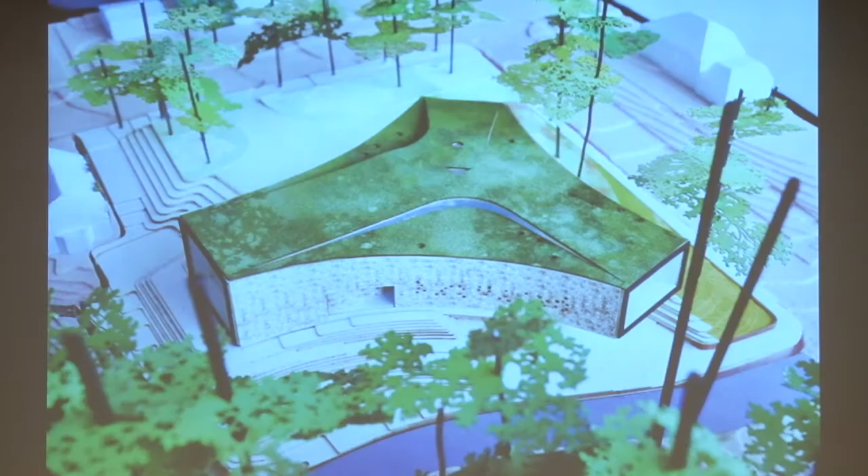Another thing we heard from people was that the idea of food preparation is really good in a space, to help break down some of those barriers between people and make it possible to communicate. These are just some of the drawings and models used to plan the building.

Now it came to the masonry, like what do you do as an architect? You have this brick campus. We thought masonry was a good idea, but we really wanted it to be sustainable. We started to realize there's a potential for the use of wood. We always like using wood as a renewable resource. Here they had this white cedar, which is resistant to rot and insects, and it's also sustainably harvested there.

But then at one of the site visits, the project architect came upon this building, which is a barn, and we noticed that the barn has wood used as masonry on it. A long forgotten technique, but it was used in Michigan for a while. We found out there was one surviving person who still knew how to use this.

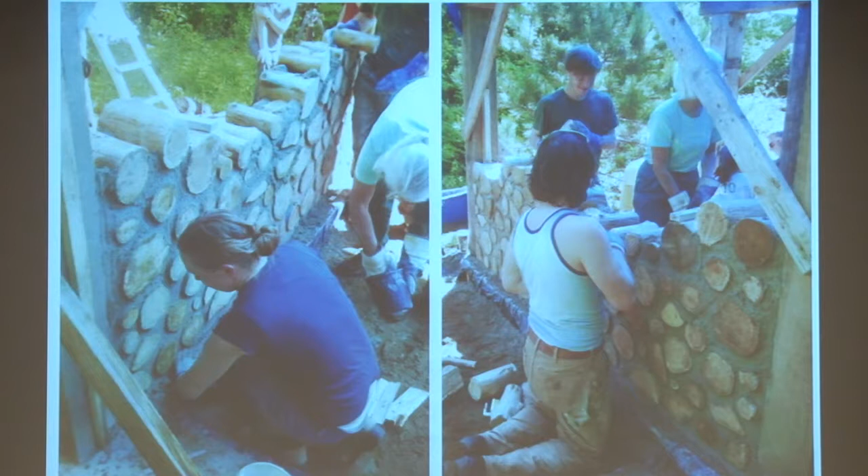He was basically doing backwoods saunas and things like that. So we asked him to come and teach us how it's done, and also teach our contractor who were already on board. The college really liked the idea of reviving this technique, a heritage technique. This is our studio learning the technique.

Basically, you get all the insulation from the wood, and it's used just like brick. There's mortar in between. You put a line of sawdust down the middle of the wall to give the thermal break. And then we thought, wow, this is really something relevant for now because of climate and the need for embodying carbon instead of putting it into the atmosphere. We tested a lot of different aesthetics to see how we could bring it up to the 21st century, also in the way of making it.

I think everybody really liked the connection between the individual: every log is different, every tree is different, based on how much water they had when they were growing up and the climate, and every person is different. So there's just a great connection with this material.

And then we pushed it to try to do new things with this technique, and essentially had to buy this wood like a year ahead and have it dry out very slowly. So once we got our client to love this as much as we did, we bought the wood, so there was no going back after that.

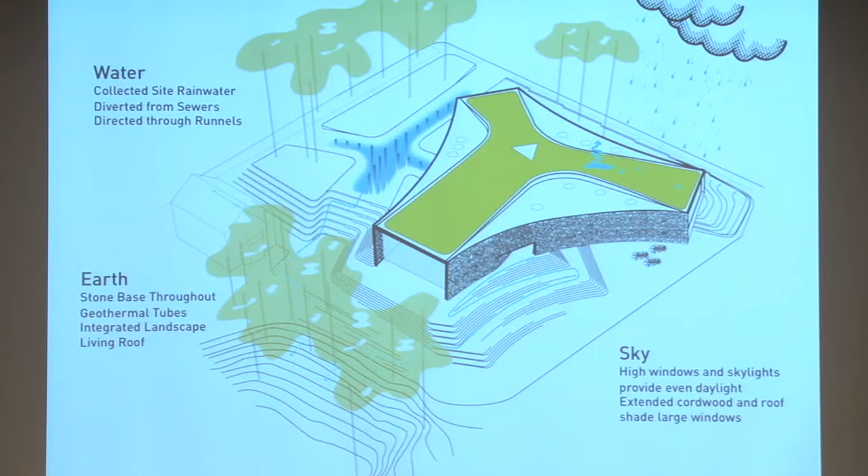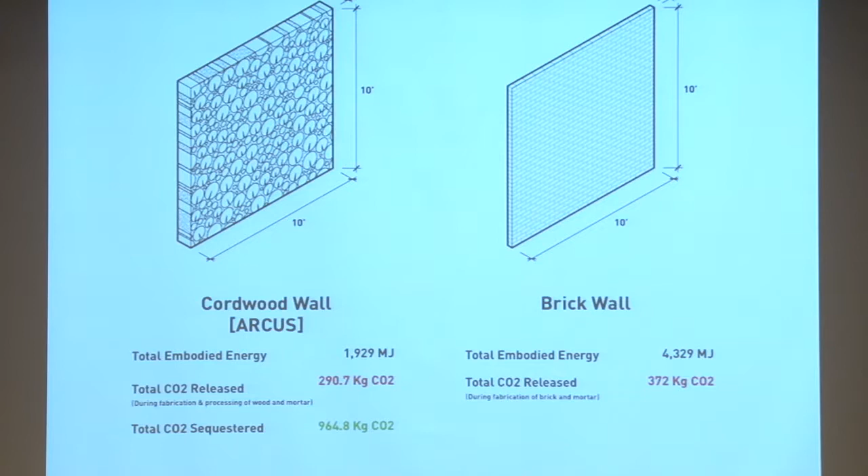What's really cool is it embodies carbon, so compared to a brick wall, you're sequestering the carbon inside the wood, because you're not doing much processing to it. So basically it's like taking 10 cars off the road just by building the walls, as opposed to putting that carbon into the atmosphere. We finished it last October, and the school is now in operation.

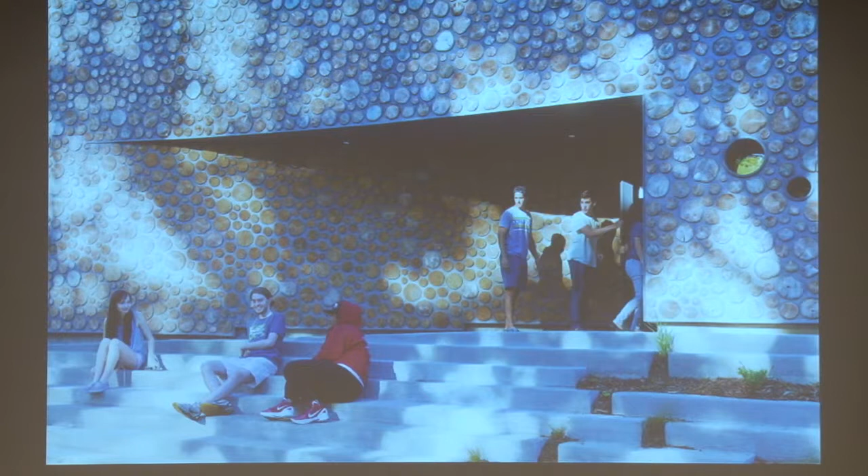I'm just going to show you some pretty pictures to end us all. The building lands differently on the different ends. This is entry from campus, and this is the window that goes out to the grove, and this end kind of cantilevers over as it addresses the college. This is the campus entry, and you can see the wood there. We used some circular openings, which the masons had to do the final placement of.

Inside is really super bright, with clerestory lighting and very light colors, and different kinds of meeting rooms around in the space. This is the entry from the neighborhood side, or the city side, the community side. You come in and the hearth is at the center, the kitchen, and then these different meeting rooms of different sizes. This is a little coat locker space in the entry.

This is inside the office area for faculty, but essentially it's a new building type to address social justice. Here's the main space set up for a small lecture. It's really quite accommodating for many different things.

Some of the areas are smaller spaces for work, and here's the seminar room with this eyebrow window, we call it, that you can see through. You can see the wall there. So it has been used already for a conference on social justice, which is really great. And this is just the building from all the different sides.